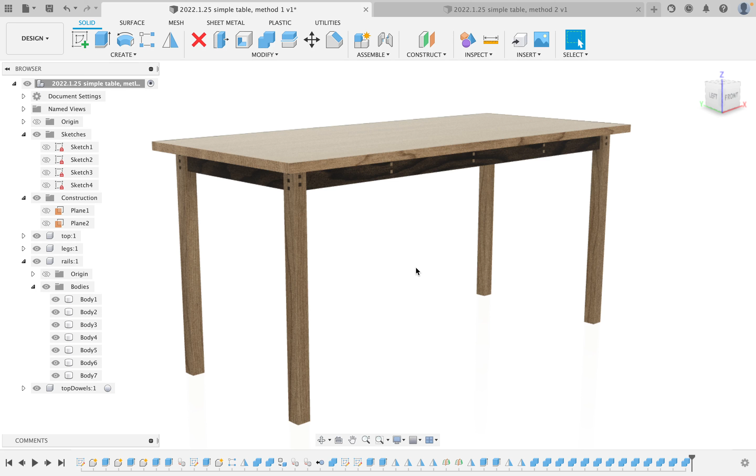I'll close this one that we already have, and we're going to start from scratch. In the same way we started before, we'll make sure this is in perspective with orthofaces. We're modeling in imperial for our American friends. And I will say start a sketch, and this starts off the same way.

I'm going to draw a center point rectangle, looking from the top. I'll hit D for dimension and give it some dimensions. We'll use exactly the same dimensions as the last one, 61 by 27 inches, which is fairly standard for a dining room table. And this is where things are going to be a little different. I'm going to draw a leg.

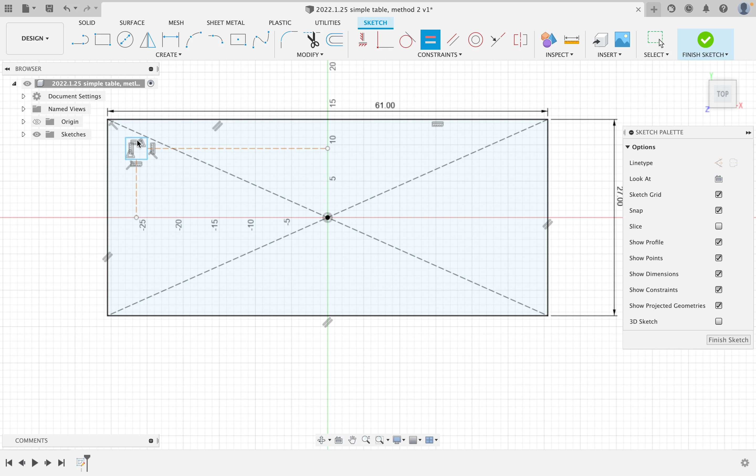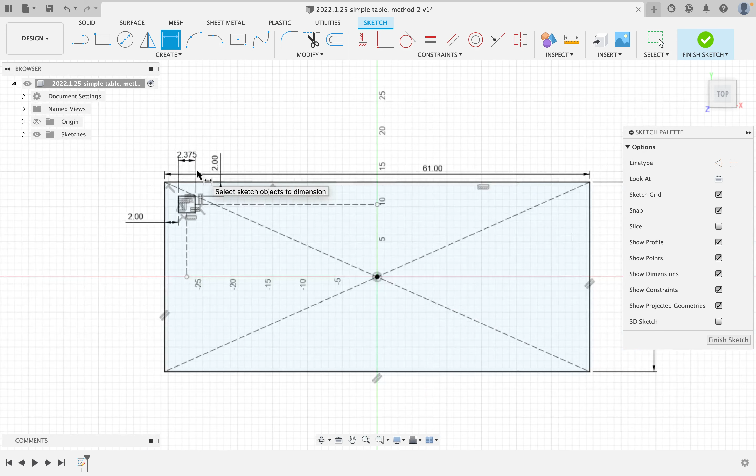I'm going to draw a center guideline from here across, and another center guideline from here across. I'll make those two guides by clicking and hitting X. I'll hit equals and make the two sides equal to turn this into a square. I'll say they are 2 inches from the outside edge by typing it in, and I'll dimension this at 2 3/8. Now they're all fully defined, including our guidelines going to the center.

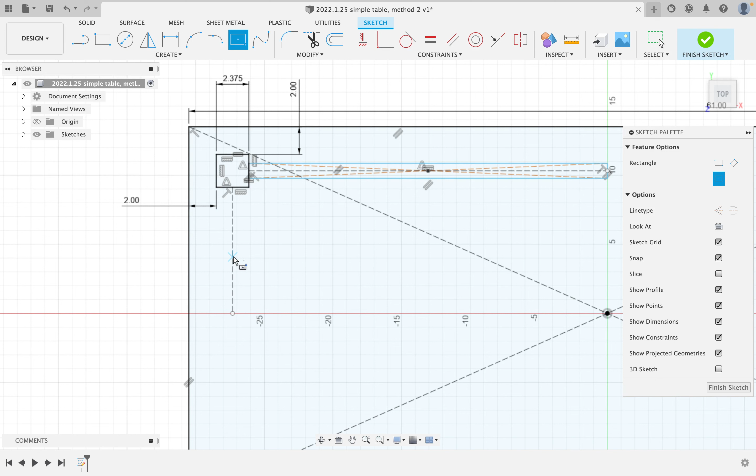Note I didn't draw the guidelines through the center because I'm not actually going to be mirroring any of these components. What I will do instead is find the middle of our guidelines and draw a center point rectangle just like we did before, but only halfway — and that is where this distinction starts.

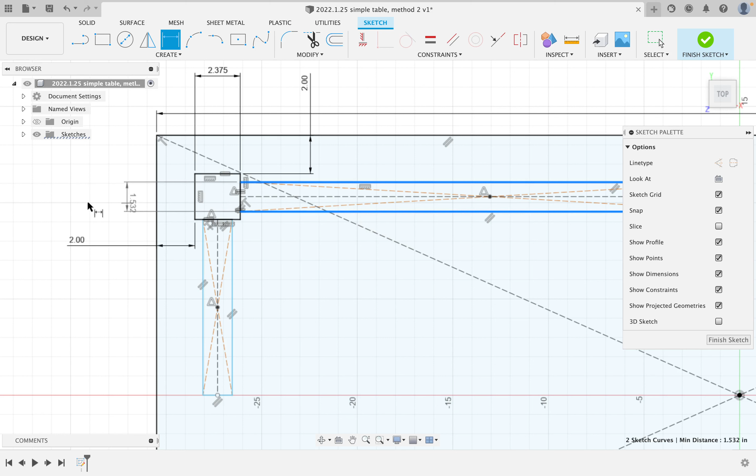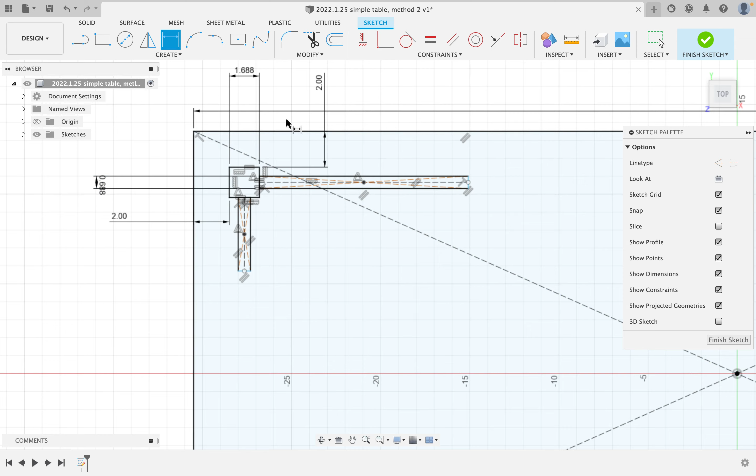I'll say equals, and like before, if I click and hold, I can pick which one — it will allow us to pick all the ones in that line. Those are now to depth, and I'll make those exactly 11/16. Wait, was 11/16 what I used for that? Yes, 11/16, I believe. Oh, that's why it looks so wrong — 1 11/16 was the dimension I used for those pieces. I don't know why it didn't take when I put it in before.

Now these are in the wrong place, so I'm going to pick the outside edge, say coincident with, and they are coincident with the center. I'll do the same thing with this outside edge, coincident with the center, and it will go all the way to the center. I'll now say finish sketch.

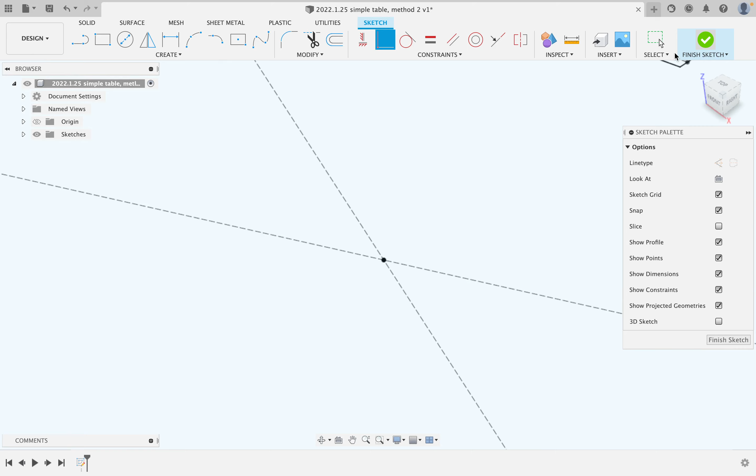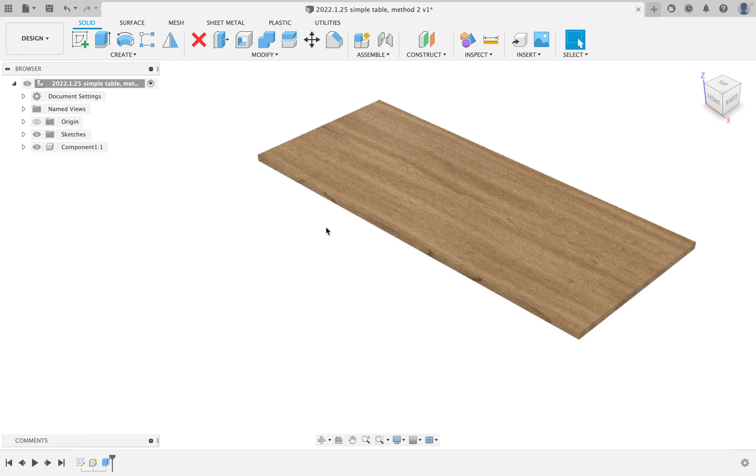Note I didn't create all the other pieces because I really don't need them. We'll start by making the tabletop the same way as before, selecting all of it and typing in 1 1/16 — I believe that was the thickness we used, though it might not have been exactly, but it's the right idea. We'll say new component, and call it top. It's always a good habit to name components as you create them, and we'll hide it.

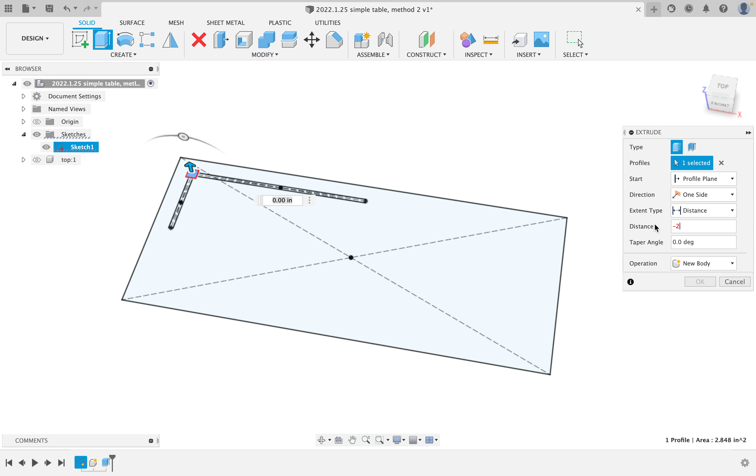We'll turn our sketch back on, and we are going to start by modeling our legs. We're just going to model one though because we've only got one, and I believe we made it -28 inches. We will say new component.

It's nice that it's telling us we turned on Do Not Disturb. I'm not exactly sure how that happened because I didn't touch anything and my phone is sitting right next to me. But I'll pretend that was supposed to happen, because Do Not Disturb was supposed to be on already.

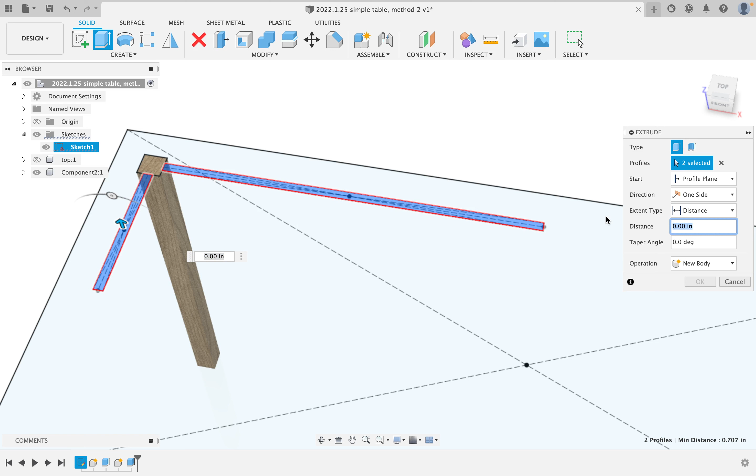So I'm going to make these rails -2 3/8. And instead of joining them, because that's not useful, I will say new component.

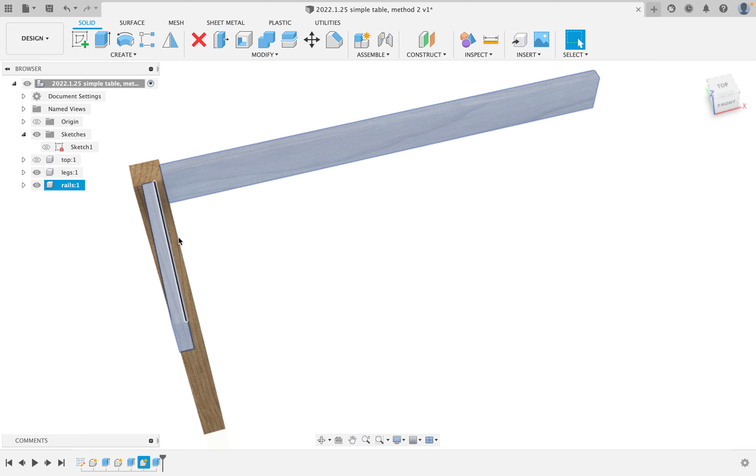We'll call this one legs, even though there's only one in it. And we will call this one rails. Now, at this point, last time we turned off our sketch, so we'll do the same thing. But instead of having 4 rails and 4 legs, we have 1. And what that allows us to do is come in here and make some joinery.

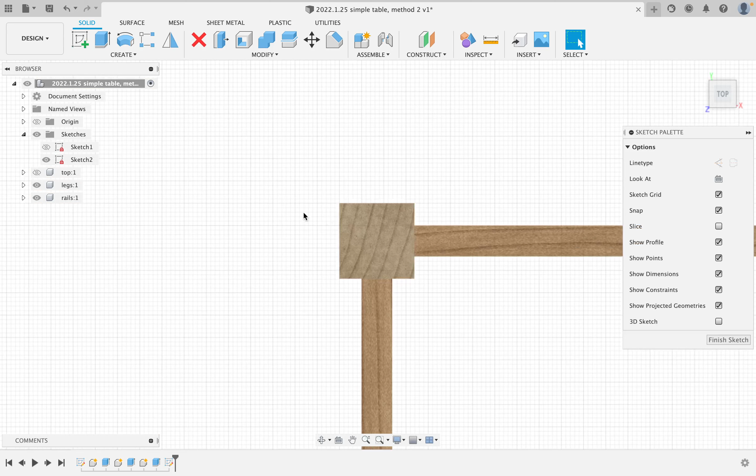On the edge of our leg, we are going to cut a tenon. That's not how we did it last time, is it? Well, this is how we're going to do it this time. We're going to cut a tenon in by drawing a line, selecting that line, and making it a guide by pushing X. We're going to create a center point rectangle.

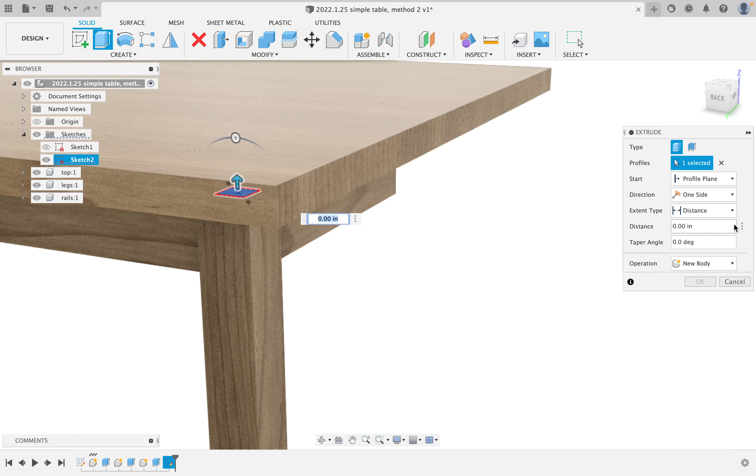We're going to make it a center point square by making the sides equal. And I'm going to tell it how much of a shoulder there is going to be, and we are going to say it is a 3/8 inch shoulder. Now I'm going to have that go up, and we will turn our tabletop on, distance to object, pick the top, and say join. We'll turn the top off again. Okay, and that has created that tenon on top for us there.

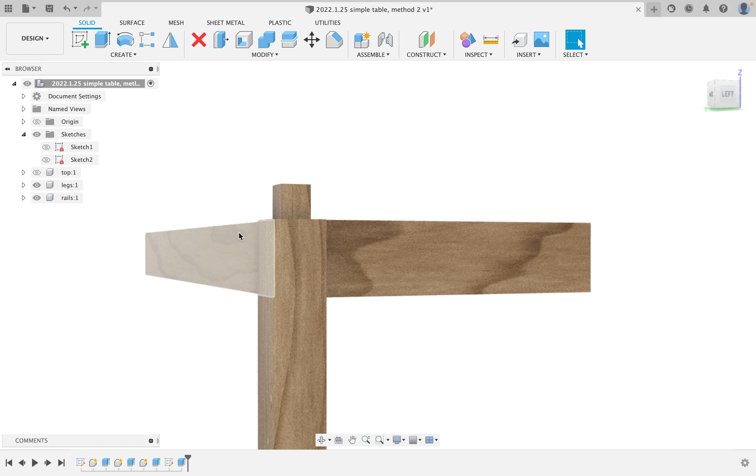We are going to do the same sort of joinery on these edges. I honestly can't remember what joinery we used last time, but we'll do something that looks fairly nice. What I think we're going to do is make a nice through tenon on each. We'll do 2 through tenons on one and 1 through tenon on the other, and that should be relatively easy for us. What I'm actually going to do is square through tenons.

So we will turn off our legs, which includes that nice tenon. I am going to open it up here, and I will draw a guideline. If we hit X before we draw it, it'll work the same way. So that's that. And we will draw a center one as well. And I'm going to use a little trick that I sometimes use.

I will draw a center point one. Oh, we need to make sure it's not doing it as a guide. We will draw a center point rectangle. We will draw another one up here. We will draw one down here. I could mirror them, but it's not really necessary.

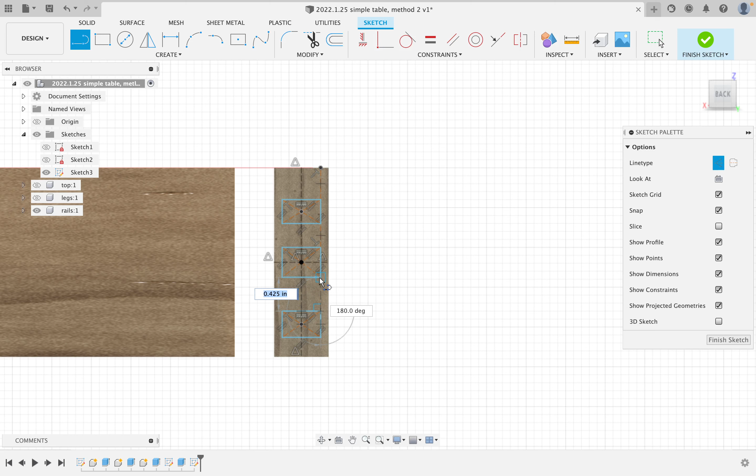I'll turn on the guide. 1, 2, 3, 4. So now I have 4 guidelines. I'm going to make those pieces equal, so they are all squares. And I am going to go in here and tell it I want those to be 3/8.

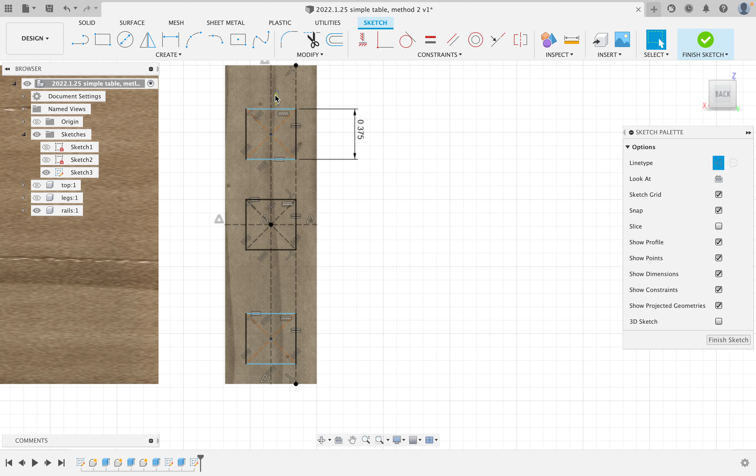Now they are in rather awkward position at the moment. I can move them up and down, and that's great. I could do it by eye. What I really want to do is have them evenly spaced. So the reason I drew those extra lines is that those are all going to be equal.

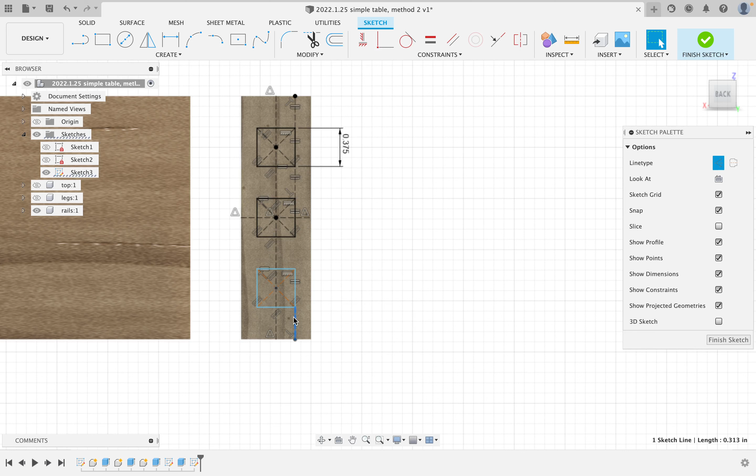And now I have those evenly spaced. I don't even need to know what this dimension is. I know they are evenly spaced. Now the problem with this is, as you've already been able to see, that doesn't give me the spacing I need. So we're actually going to just pretend we didn't do that. We're going to go back and call a mulligan on our dimensions.

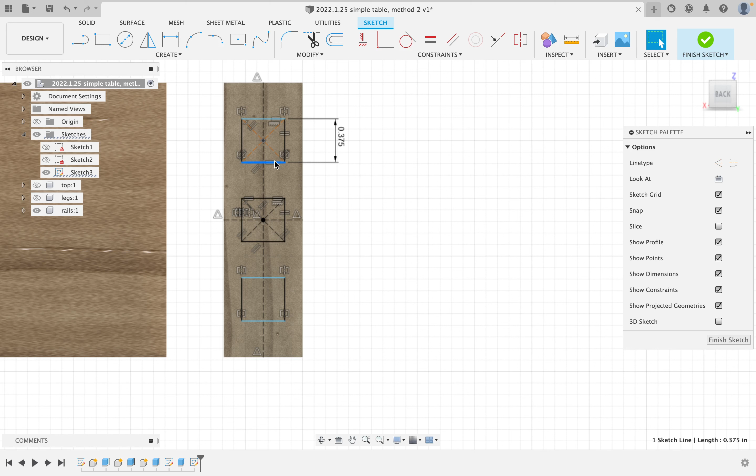I will pick this one and delete it altogether, including its center point. Now, if I pick the top one, I can mirror it across the center line and hit OK. Now we know where the center one is. I think we have all these equal, right? 1, 2, 3, yes, they are equal. Very good. So they are all 3/8 inch.

And the only thing I need to do now is tell it how far from the top this is going to be, and I'm going to make it 1/8 from the top. Now that means that if we were going to do this as a separate tenon, that would be awfully close to that top edge. But in this case, it's not really that close to the top edge, and there's a huge tenon in the leg that is going to give us the stability on top, so it's not a problem.

We'll say finish sketch. We're going to draw on this other one here. We will draw a center line.

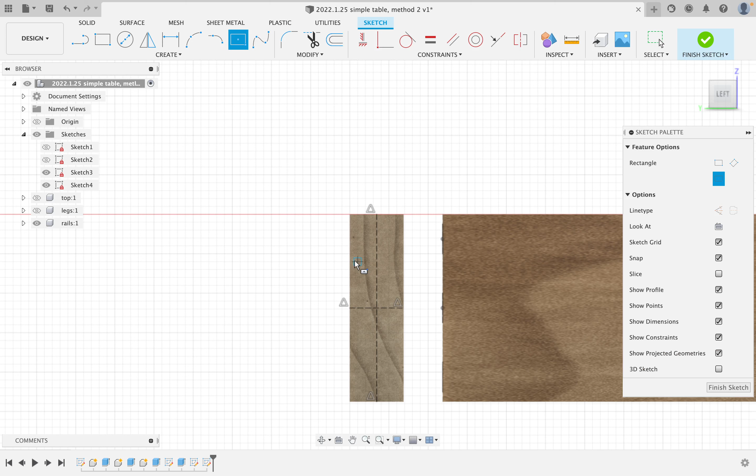We'll draw another center line. Whoops, that's not in the center. We'll take our line tool, find the actual center, and now draw a center point rectangle. We'll make it a center point square by making the two sides equal, and we're going to use our mirror tool to mirror it across. By double-clicking, it selects the whole thing across that middle.

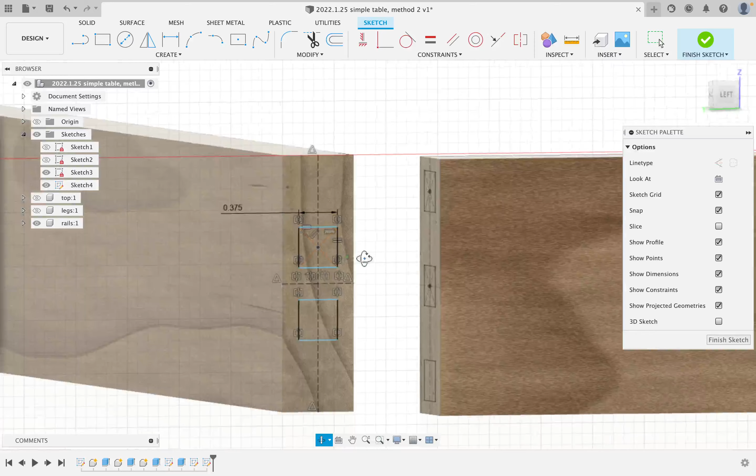Now, if I say I want that dimension to be 3/8, just like the other one, I can look over here and see that what I really want is a space between these two. If that is 3/8, what I actually want it to be is a 1/2 inch between the two, so they will not conflict with each other when they go all the way through the leg.

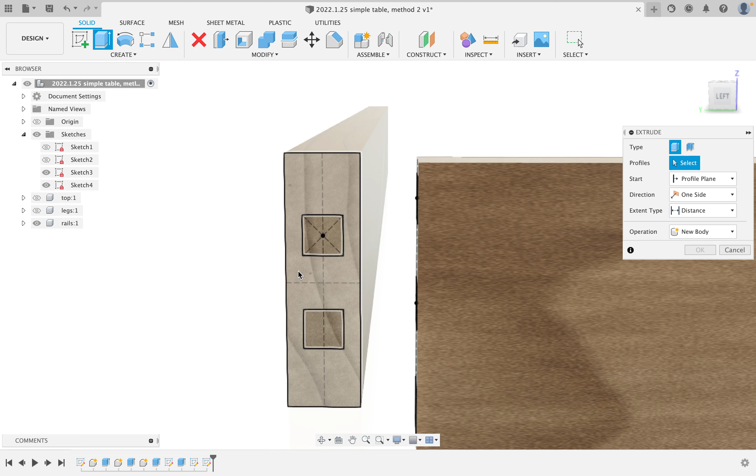Now, if I say extrude, I want to extrude these to the outside edge. What we're actually going to do is make them go a little beyond the outside edge, a 1/16 of an inch out. I will say join, turn the leg off, and hit OK.

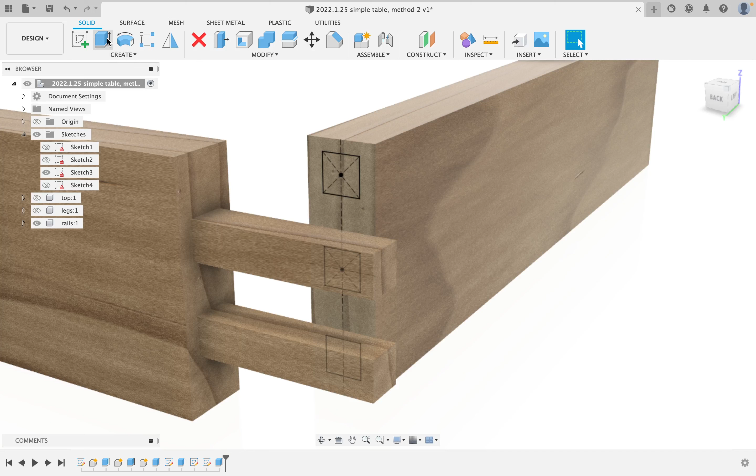We're going to go in here and hit extrude and do exactly the same thing. Where has it gone? You can peek underneath. We'll say distance to object, turn the leg on, pick that, go a 1/16 of an inch proud, and say join again.

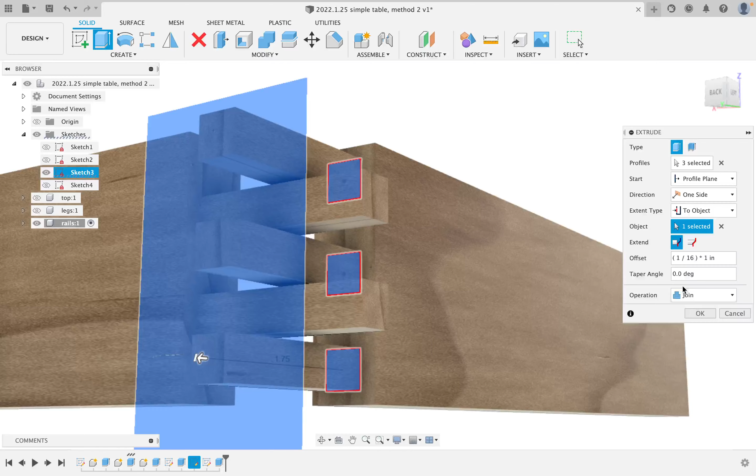If we turn the leg off and hit OK, you can now see these three are going to go through. The two in the middle are going to go through no problem at all, and that will go through the holes in our legs. Now, if I say combine, I'm going to turn the leg on and cut the leg with these other two pieces.

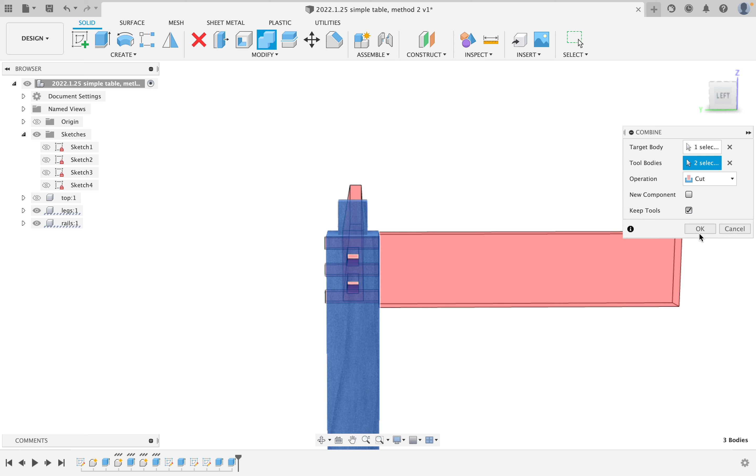Now if I turn the rails off, I can see I've already cut the joinery in my legs. So I've got the leg joinery going into the top, and the rail joinery going into the leg, and I've done it all on one corner.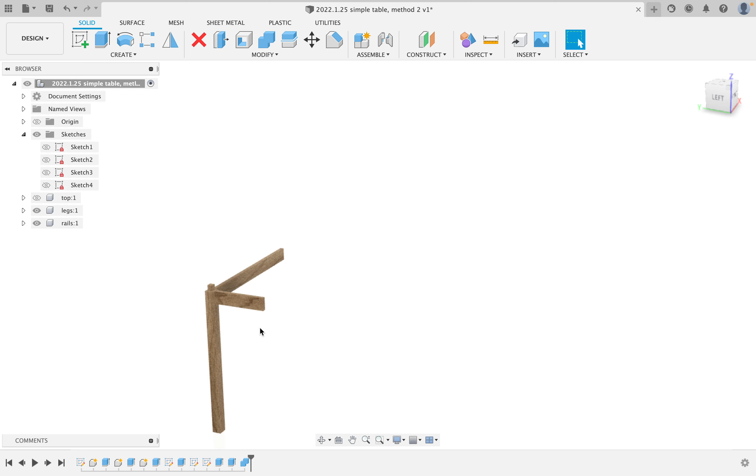The only other thing I need to do in here is we had some internal bracing. I think we had longitudinal internal bracing, did we not, in the other table? I can't remember. But I think what we will do in this case is have some cross pieces.

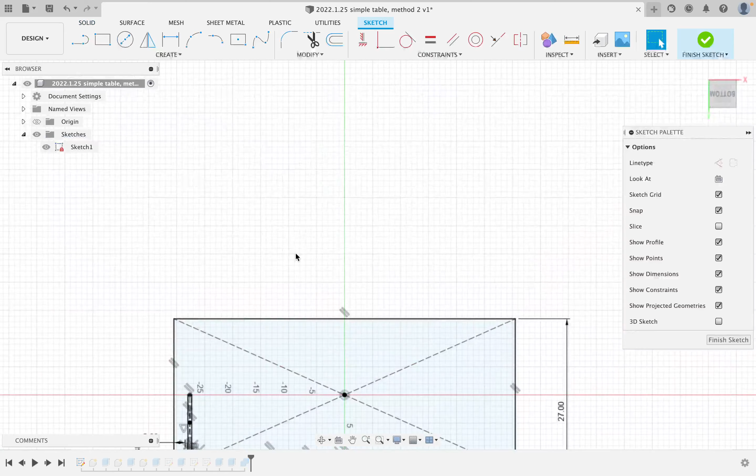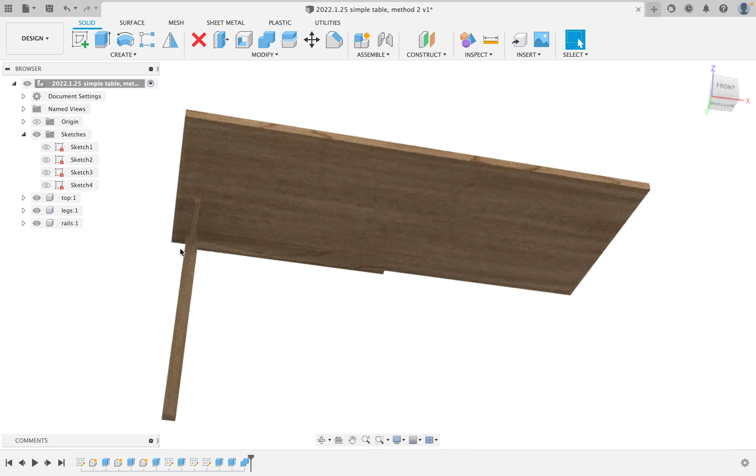So I'm going to go in here to our first sketch, and I am going to join from... yes, that's right. How are we going to join that across the center? We'll do a half lap. We'll do it after. All right, just thinking on my feet here.

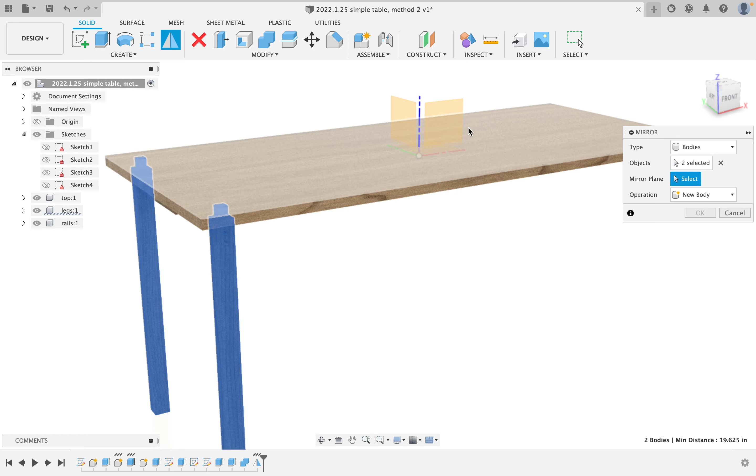So we now have all the tenons joined in. There are no floating things lying around. So what we will do is copy this leg across the center line. Right-click and hit repeat, and copy that leg. Remember, we've already got the joinery cut in, so we don't need to cut any of that joinery the next time. So I now have that already in there.

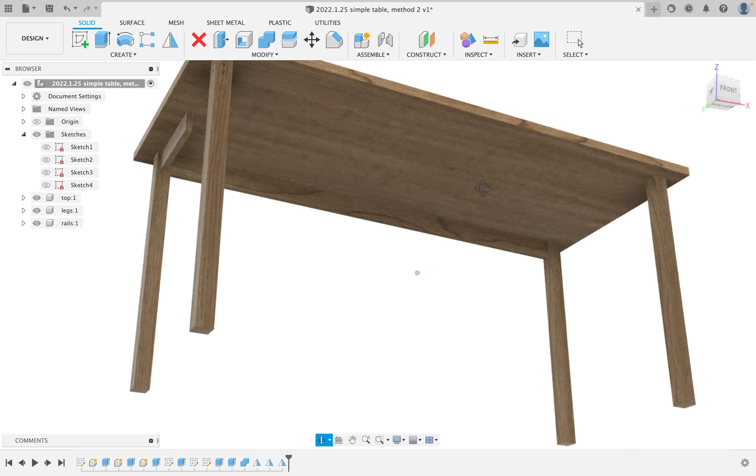We've got these, and you can see we've got all our mortises cut, completely finished. So I'm going to say repeat, and mirror that half the long stretcher, and mirror it across, and it will join. So now I have our long stretcher as a single piece, and I will mirror it again across the center. So now I have two long stretchers.

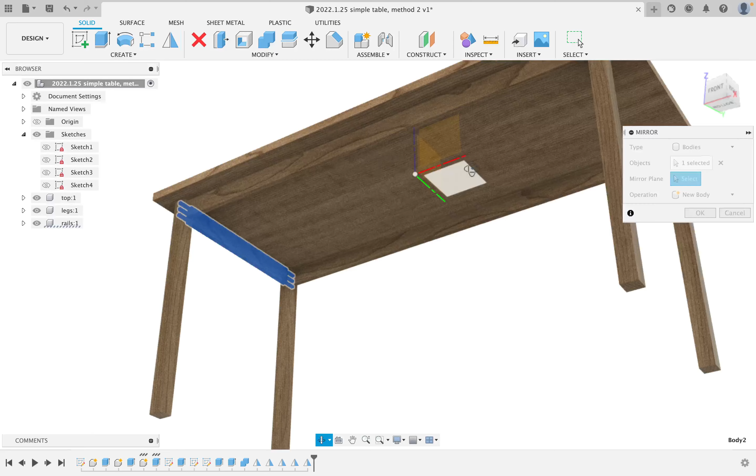I'm going to do the same task with this short stretcher and mirror it across the center. Then I'm going to mirror that now completed piece across the center in the other direction and say new body. So now I have that piece already in place.

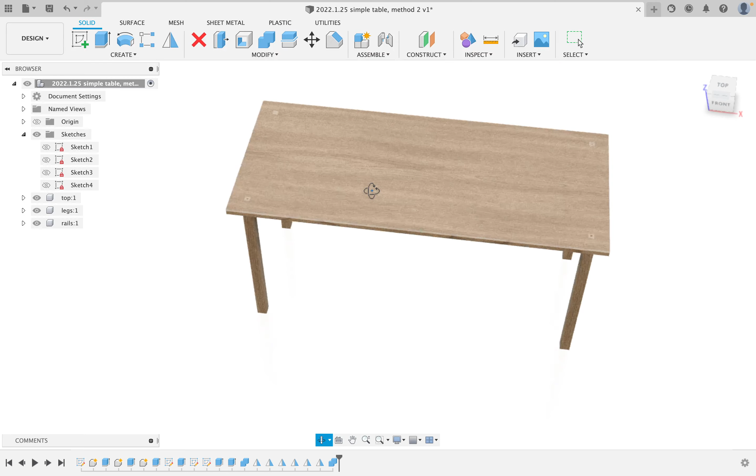While we're at it, we're going to say combine, and cut the top with our 4 legs. We didn't do that with the one leg because it didn't make sense to make one hole and then go back and do it again. But what we're going to do is have it going through the top of the table now, which I think works out quite well.

If we hit A for appearance and change to having our legs in this walnut, not that we need to make the legs out of that walnut, but it will show us that the end grain is coming through the top of the table.

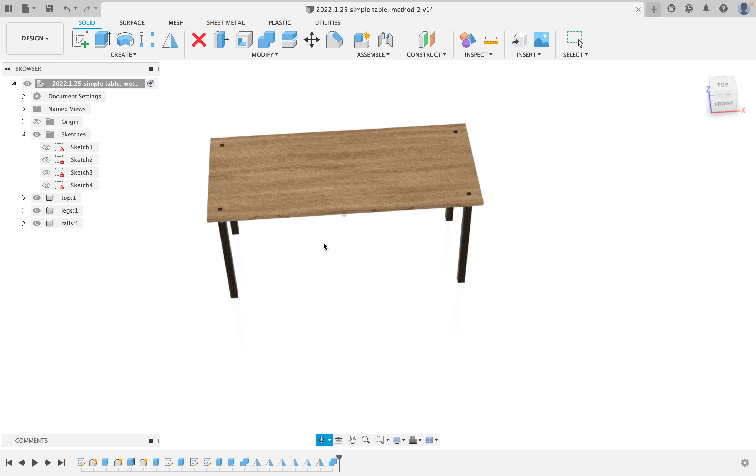And that will work quite nicely. It's very nice and decorative for us, actually. So the only other thing we want to do here is have our cross bracing on the bottom. We did straight ones before. I think it's more interesting if we model something similar, but not quite exact.

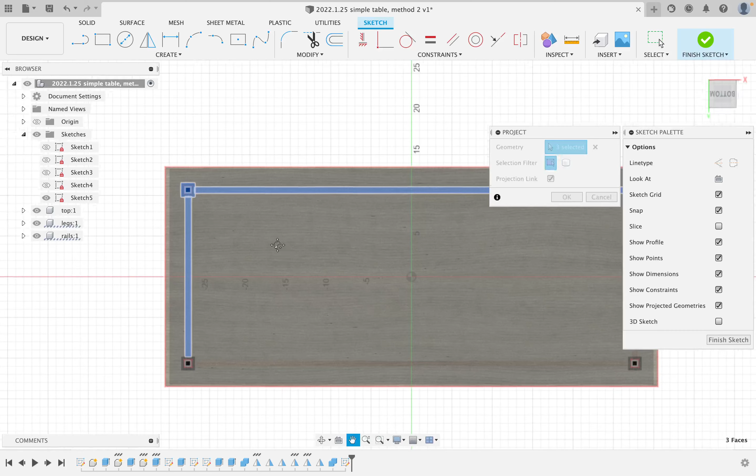So what I'm going to do is hit project, and I'm going to project the legs and the rails. Project just copies the dimensions from these objects. So all I want to do is make it so that I can use these as anchor points for lines and curves when I am in this sketch, and I think that's very useful.

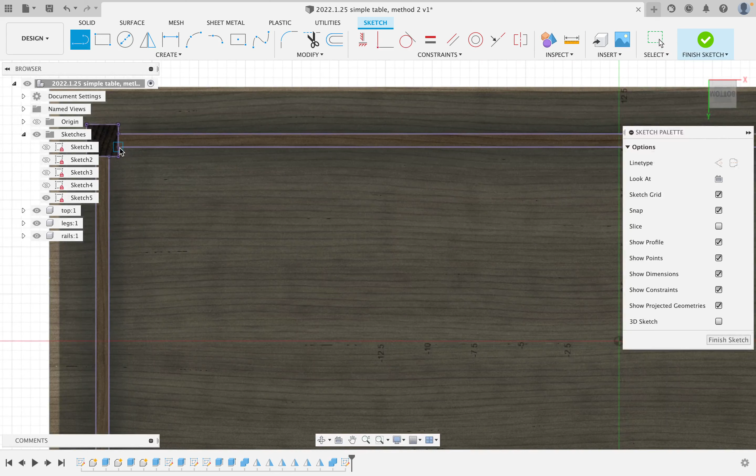So what I actually want to do is draw a stretcher that goes from one side to the other. I'll draw it in one direction. We're only going to model one of them, and then we're going to copy it. And we now have our cross brace.

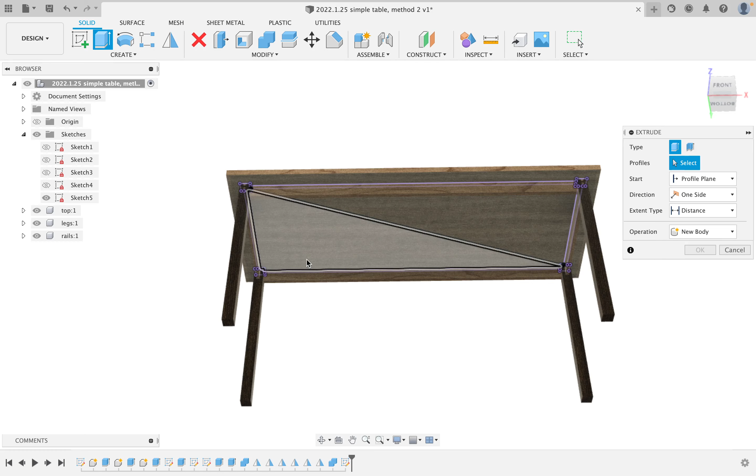If I hit Finish Sketch, and I select that piece - my apologies if you can hear the fire trucks driving by outside. Seems like the whole city is on fire. That's the fourth one I've heard since starting this class today.

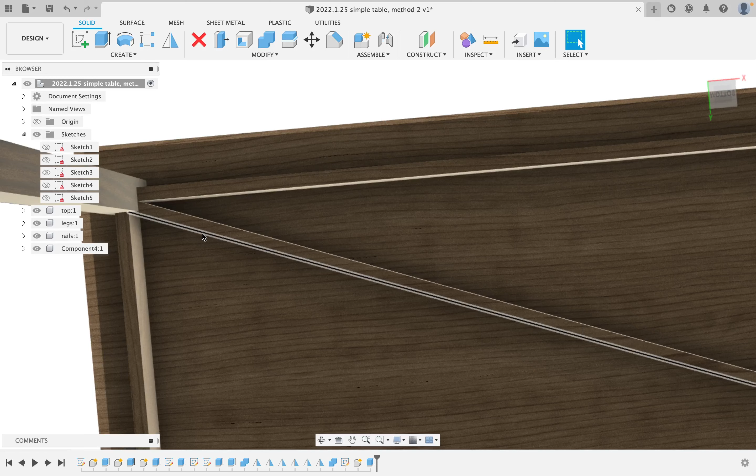And I'm going to say to object, and it is going to be the same depth as my outside rail. And we'll say new component. We'll call this brace. I think that worked out quite well, right?

It's not bad. So what I'm going to do is turn off the legs, and I'm going to take a look at this at the end of this brace. I think that looked quite good. Not bad at all, right?

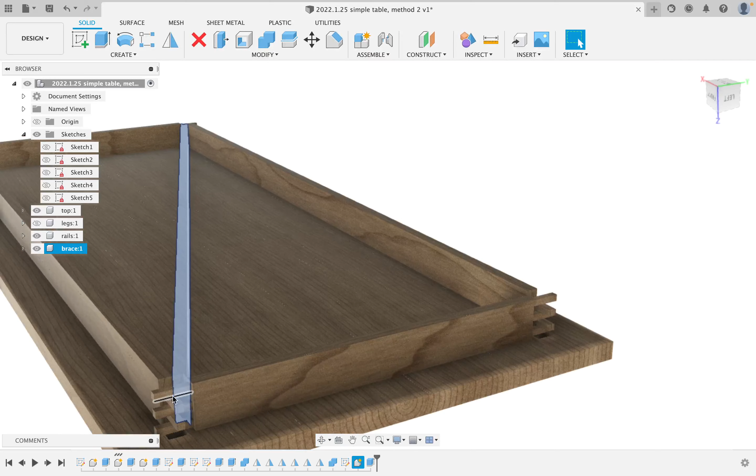Let's deselect it, and we'll get rid of our rails as well. So I can see that I have this cross brace here. Now, how are we going to join that in? We're actually going to use dowels to join that in, and we're going to use the dowels that are exactly perpendicular to our brace itself.

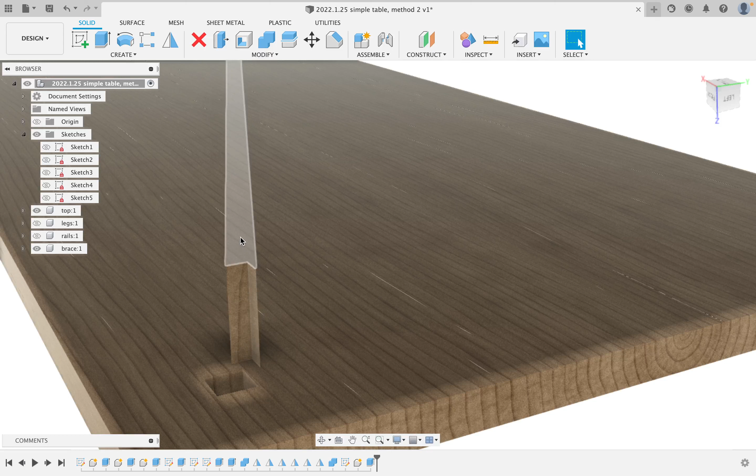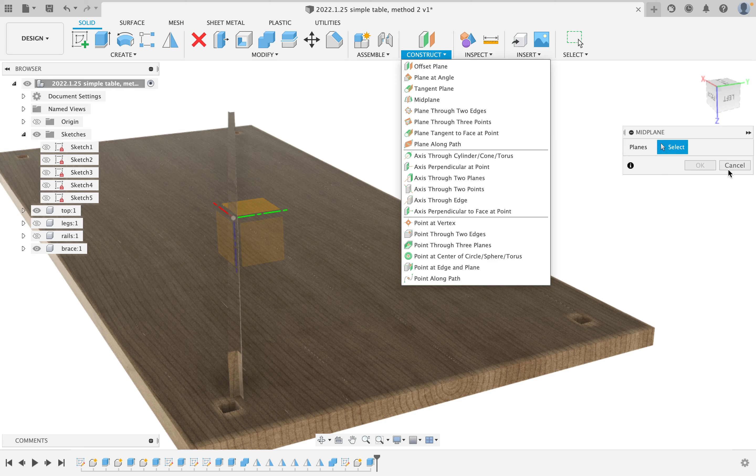Now, what I want to do to make that happen is create a plane that goes - let's see, what have we got here? Plane through, along path, plane, tangent plane, plane at angle. What we want to do is find out what that angle is exactly. So we're going to take this piece, we will inspect it, and we will say, what is that angle?

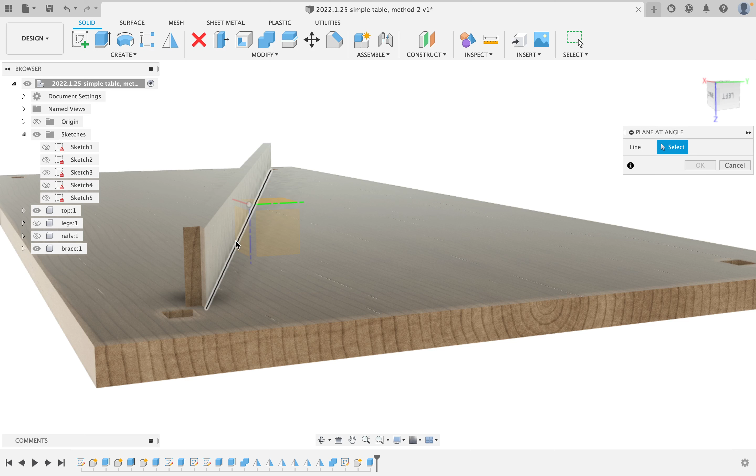That is 69.6 degrees. So what I want to do is construct plane at angle, and we will pick this, and we will say that it is minus 69.6 degrees. So we should now have a plane that is exactly perpendicular.

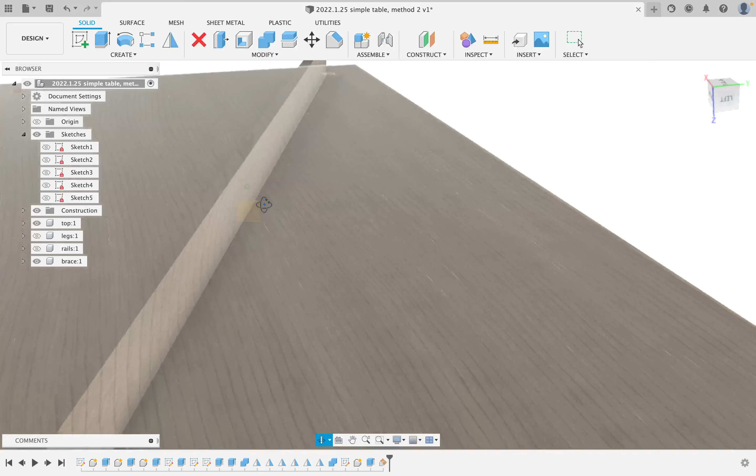Now, if we were going to do integral tenon joinery, we would be able to do it without that - we could just model right on the side. And I guess the question would be, do we want dowels or do we want integral tenons? I'll talk to you for a moment about how to do either one.

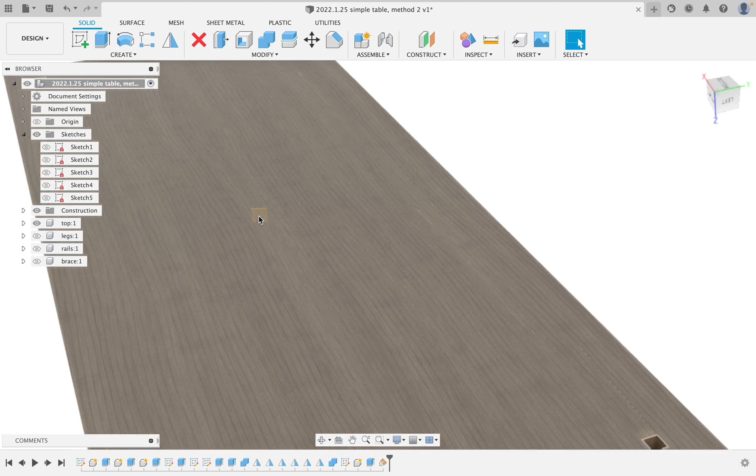Let's turn off the brace. Now we have this perpendicular plane here. And if I look at the brace, I would be able to model right on the end of this brace, creating holes for dowels that will go into our legs. And I think that's what we'll do.

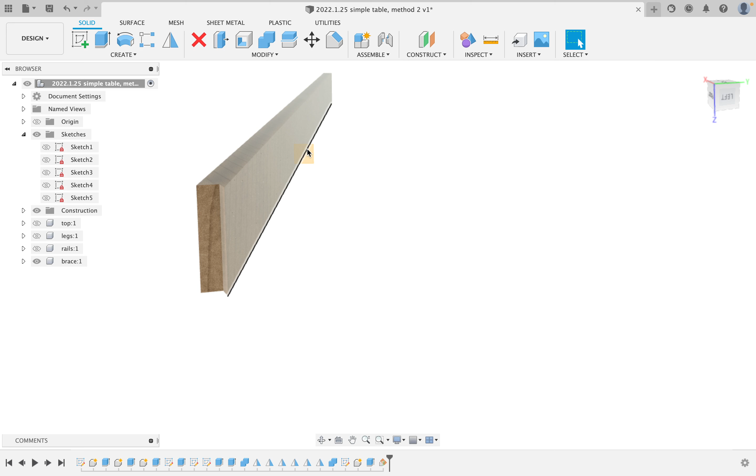But let's just take a look at how we would do the other way first. If I scroll over to the side of this brace, if I wanted to make these tenons that are constructed going out through the edge, let's just do that. We talked about how to do the dowels. Let's do the tenons, and I won't talk it through - I'll just actually show you.

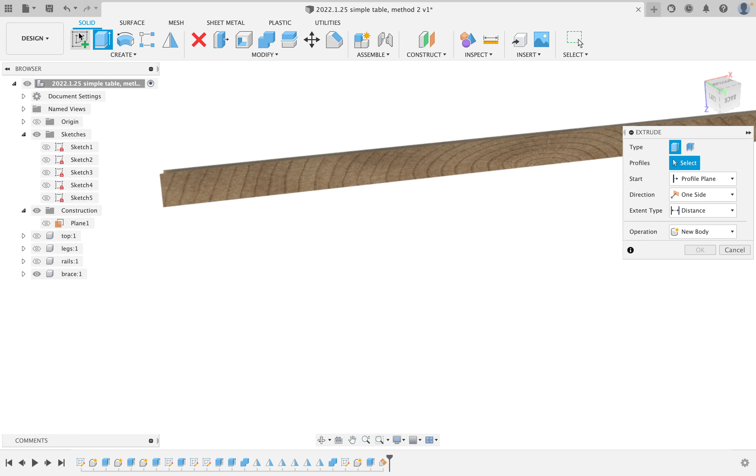All right, so new sketch. We'll do a new sketch on the side of our brace. Where does it begin? Well, we're going to look over the top of our brace and see that that is actually inset somewhat. So when we create our tenons, we don't have to worry about the fact that it's going to overlap - we just need to make sure it overlaps enough that it's on the inside.

So I am going to say create. No, I'm going to say - I'm being silly about this, and I shouldn't be creating it as a sketch on that side. All right, where's the top gone? Rails, brace. Sorry, I got a little distracted by yet another fire truck going by outside.

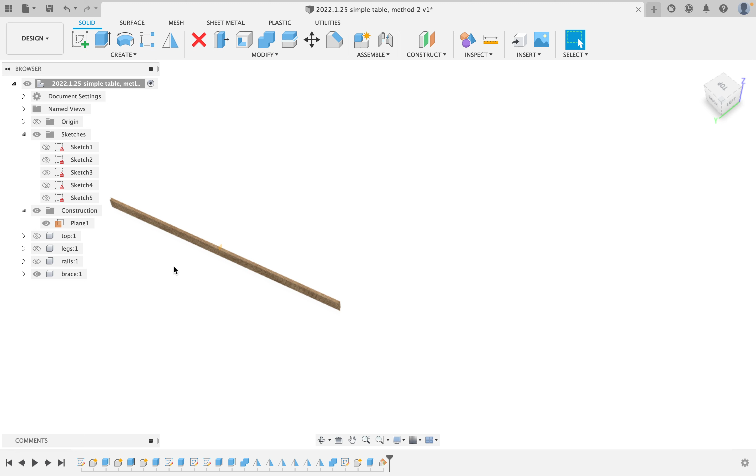So I have my construction plane. I am going to create a sketch on that little construction plane.

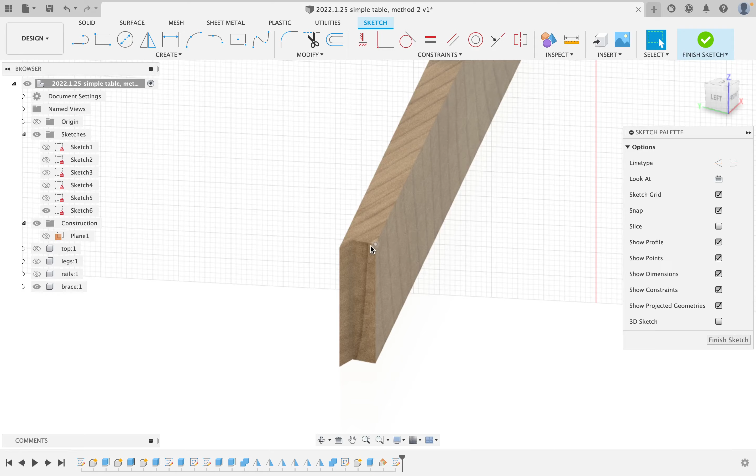I am going to project the outside of our thing. We don't need that, we just need the outside face. We need the top and bottom, and that will do it for us. So we are modeling on that.

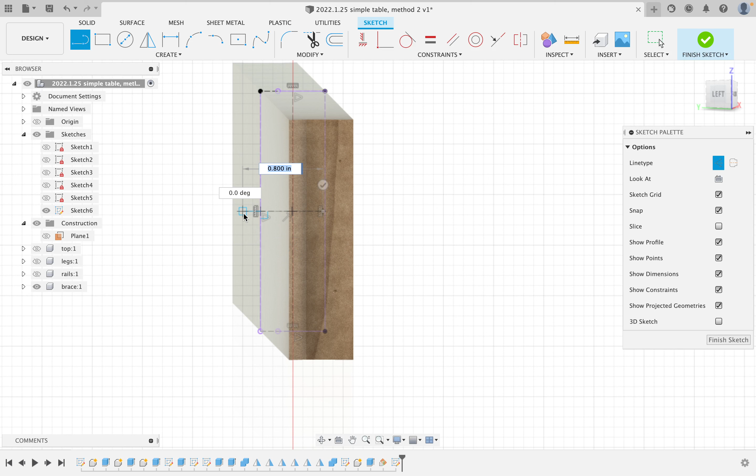I'm going to draw a rectangle to signify where those pieces are. I will create a rectangle that is exactly those pieces, and make the whole thing a guide so we know where it is. I am going to make a center line down the middle, and on that center line draw another line, side to side. Not sure if I need that one, but for now we will draw a center point rectangle.

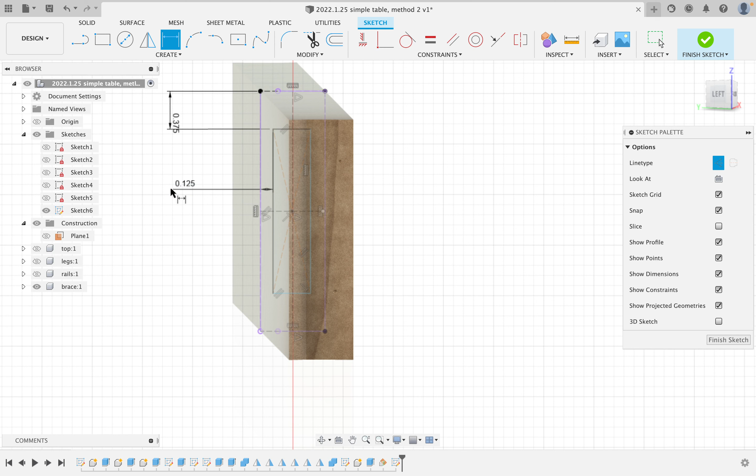I am going to give it a dimension. Hit D for a dimension. From the top, we are going to make that exactly 3/8 of an inch, and from each side we are going to go in 1/8. It looks like we are not necessarily on the center, so I am going to say coincident between this and that guide line, and now it is there for us.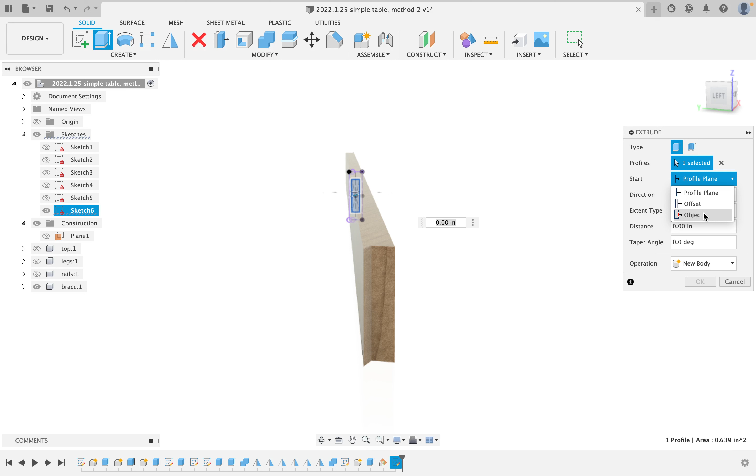All right, so we have that piece, and we are going to go from that tiny little rectangle. Instead of the profile plane, we're going to say from the object itself, and we are going to go exactly 1 inch, negative in this case, and we will say new body.

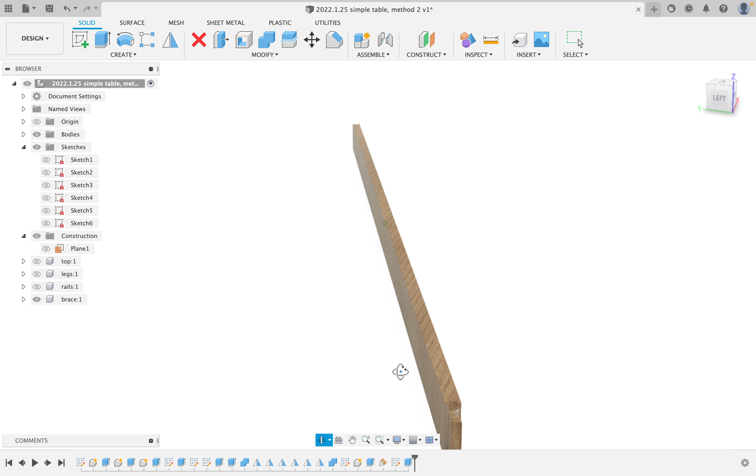Now, if we look at it, what we have here is a tenon that is going right through from the edge. I don't think we've done that right. I think we've made that an angle.

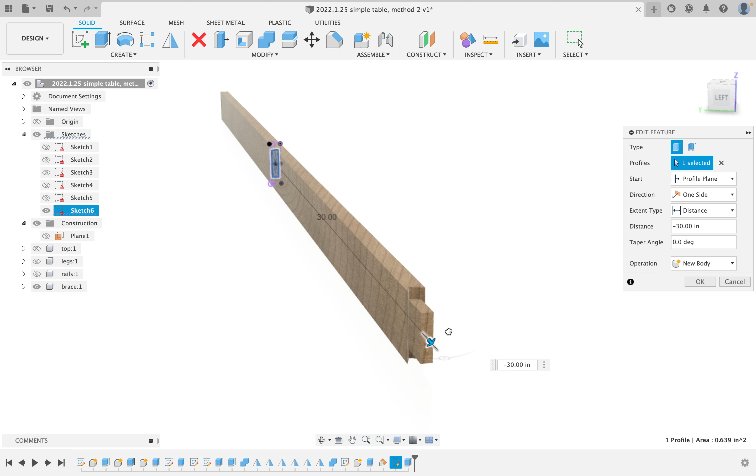My bad. Edit feature. We're just going to go from the profile plane, and we're going to give it a distance. We'll just stretch it right out through the end here, and we're going to say minus 30, and that's going to be exactly straight. There's a few ways you could get around that, but I think that's an easier way to do it.

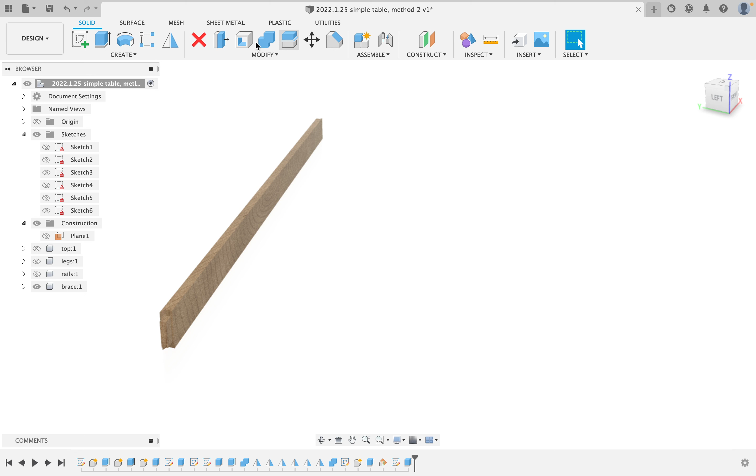We'll say we want it to be symmetric, and we will say join. And we have now created that. Could have done that with dowels, same way, but I think doing it with the tenons will be a little stronger. Next thing we're going to do is we are going to mirror that across the center line.

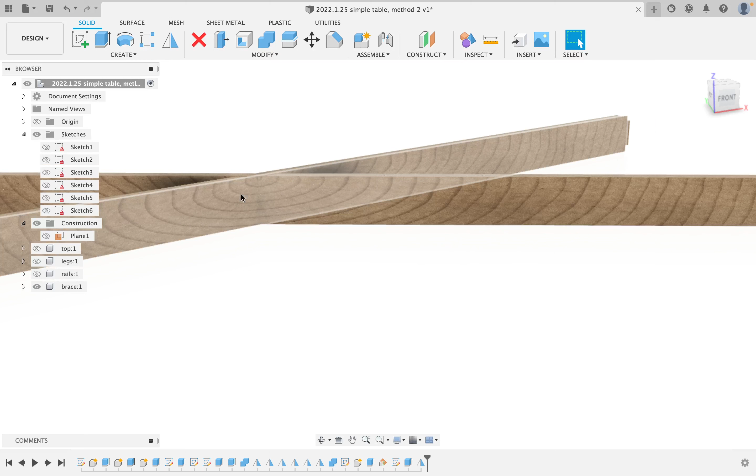All right, very good. I think I just told that to join. This is what happens when I'm modeling early in the morning. I want it to be a new body because we are actually going to cut these so they are half laps. What I want to do now is create a midplane between the top and the bottom, because we're going to be cutting these vertically in half, or at least we're going to cut one of them vertically in half.

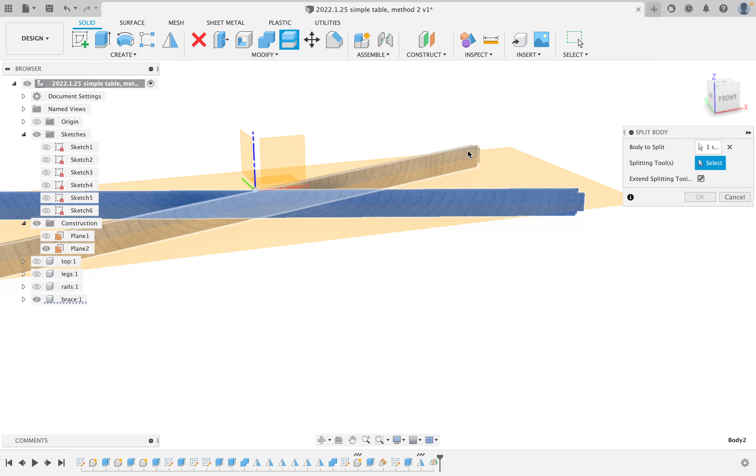Now I am going to cut this one body, and I'm going to pick the outside faces. Better turn off that so it doesn't get confused. I'm going to pick the outside faces of this other one to cut it with. And now we can see that we have this center piece.

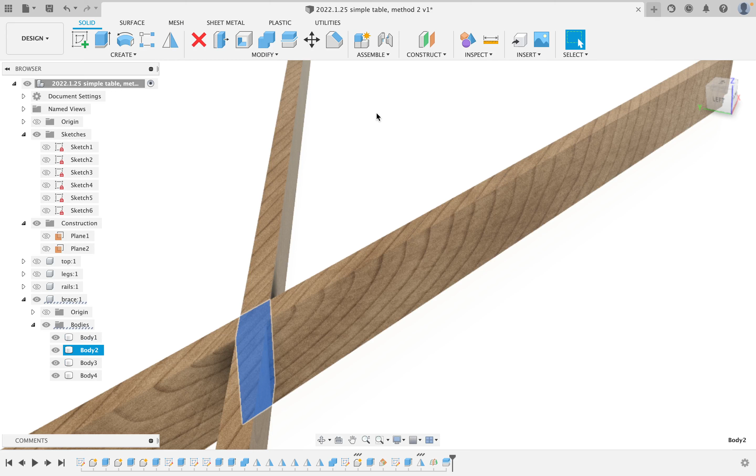I'll open this up and show you. We now have body 4, body 3, and body 2 are 3 separate pieces. Now, if I turn on this plane that goes through the middle, body 2 is which one? Body 3, body 2, body 4. Body 2 is the one that I want to cut.

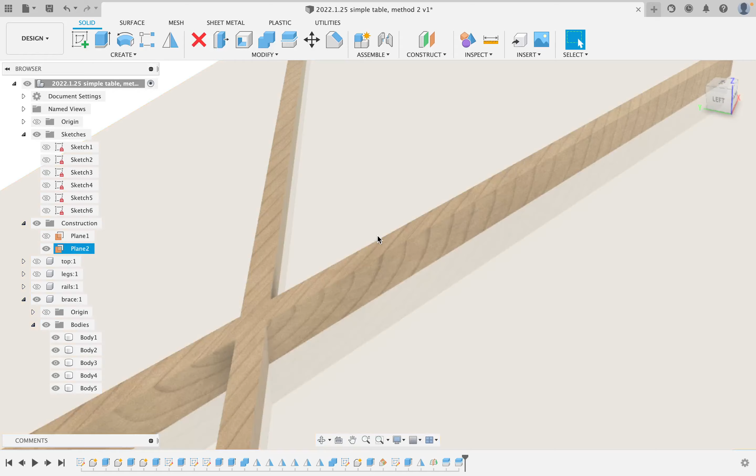So I am going to cut body 2 with this plane, which is going to divide it right in half. And I think we have created... where have we created it? We'll turn this off. We're going to get rid of the first body altogether, and I want to get rid of just the bottom half.

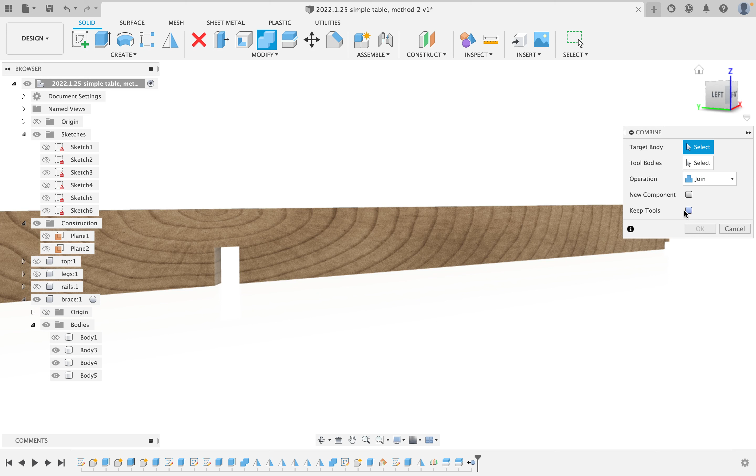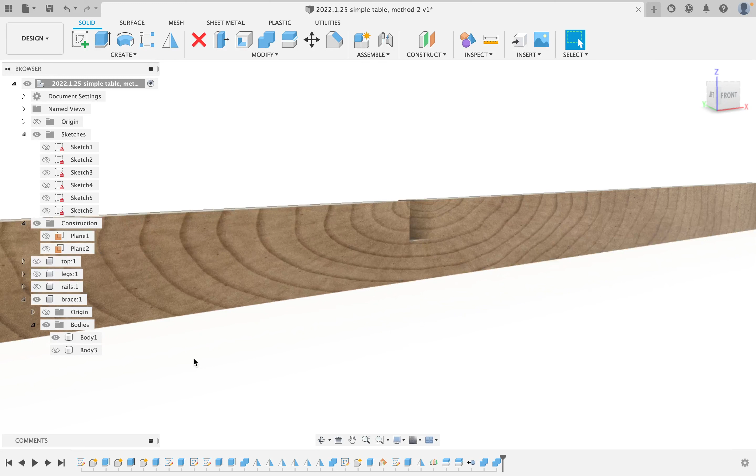Now if I go back in here and hit combine, hit join, and I will join 1, 2, 3, and we have the top piece of our half lap. We will take the bottom, hit combine, and cut. We will cut the whole piece with the part that we've already cut the half lap into. And now you can see that we have the bottom half of our half lap and the top half of our half lap. Those are already in there now, and that's no problem.

Now, in terms of the legs, the only thing we want to do is do exactly the same thing. We will cut that, repeat it for the next leg, repeat it for the third leg, and one last time for the last leg.

Now, if we get rid of our braces, you'll be able to see that we have a nice little mortise for each of those right in the side of each of our legs, and those mortises shouldn't conflict with any of our joinery. If they do, you can go in and shorten those mortises to make sure they don't, but it really doesn't make that much difference. You'll see that when you look at the model. In this case, it should come within about a 1/16 of an inch and shouldn't overlap, if I've done my math correctly, which isn't necessarily a given since we're doing this in imperial. They might actually conflict, and you might need to shorten those a 1/4 of an inch or so to make them work, but that's not really a big deal, and the whole concept should work fine.

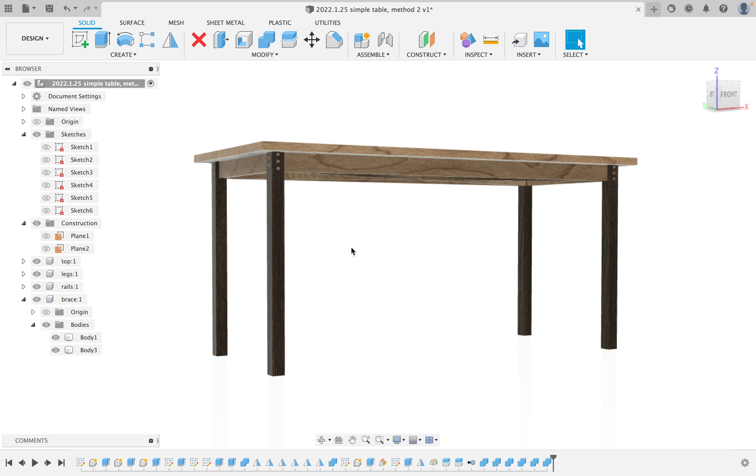So that's the other way you can do it. If you model things in their smallest components, then do the joinery, and then flip them around over the middle, it will save you a considerable amount of time, if and only if the model is actually complex enough that it warrants all that extra thought.

So that's the second different method for modeling this table, which I think might be a little different from the one we did in the last class, but looks pretty much the same from the outside. The joinery, I think, is a little different, and we have these neat little cross braces on the inside, which add a little bit of flair to the table.